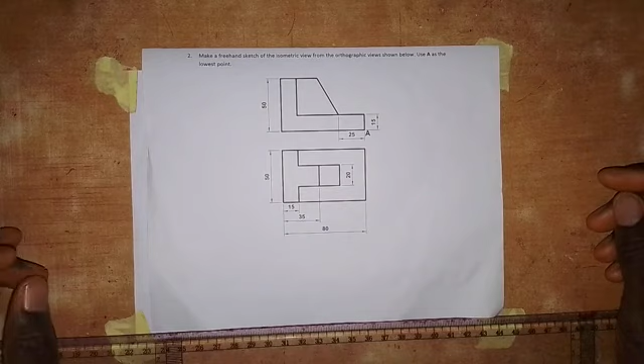Here we are going to be working on the making of the isometric view of this orthographic block views. So as we have here, we have these views drawn in first angle projection, as this is the front elevation and this is the plan.

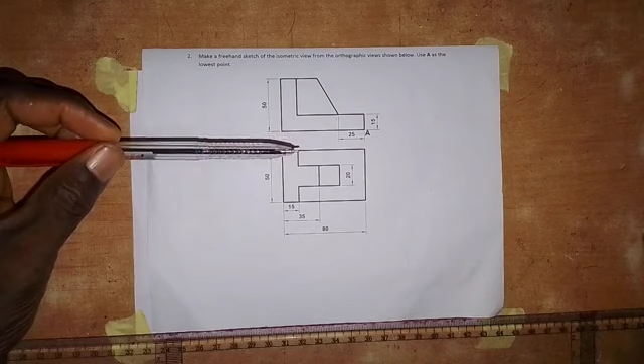Even if the front elevation and the plan is not indicated, as a technical drawing student, you should be able to know how the front elevation will look and how the plan will look. Okay, so very important. That's why paying attention in the class when you have been taught any topic in technical drawing is very important. Okay, so let's leave that.

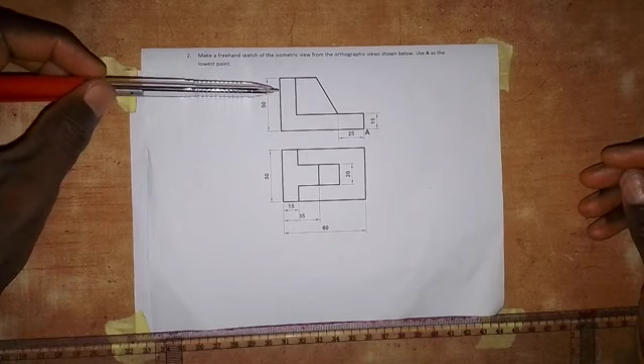Okay, now this is the front elevation, this is the plan. So let's look at the dimensions on the front elevation. We have the height from here to here to be 50 millimeters, and the distance of this point from this end is 25. The thickness is 15 millimeters, and then we have the lowest point here as point A.

Then coming down to the plan, total length from here to here is 80 millimeters, and for us to get this point here, which is this point in the front elevation, we are taking a measurement of 35 millimeters from this end to this end. The thickness of this is 15. That is, the thickness of this also is 15 in the front elevation. Then from here to here is 50 millimeters. Thickness of this is 20 millimeters.

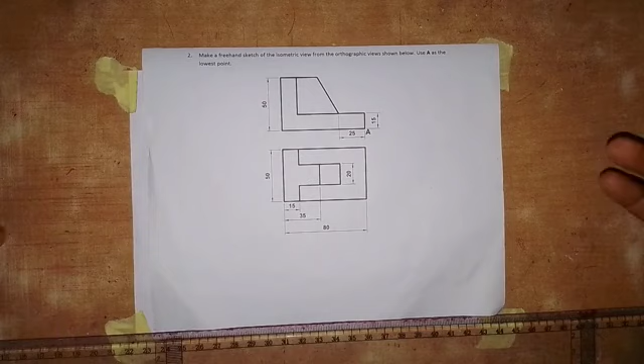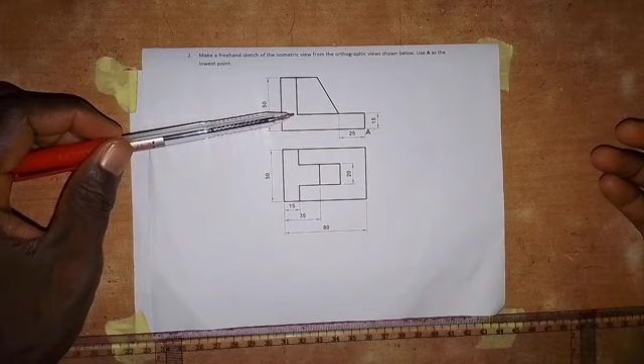Okay, so we put these parts together to obtain the isometric view of this object. But the first thing that we are going to do, as I've been saying, you need to be able to identify the main part that will give you the solid when you change it. This L shape is the main part. So first of all, produce this L shape in isometric, then we transform it into a solid object. So let's start and see how this can be done.

So the first thing that we are going to do here is to draw a short horizontal line. Just make it like this, and then on this horizontal line, mark the lowest point. Always indicate the lowest point A. So this is the lowest point, A.

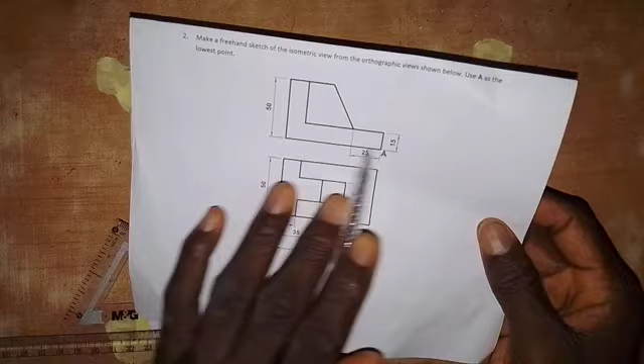Then with the 30 degrees set square being set at this point A here, the L shape should be made in this form. In this form, you cannot change it. That means it should be in isometric, but it should be on this side here. So this point should be here. Okay, this is what I'm saying.

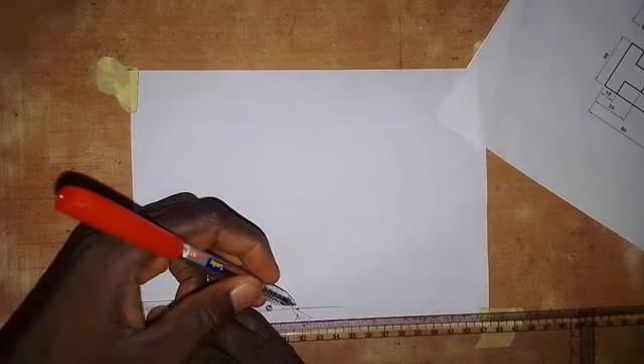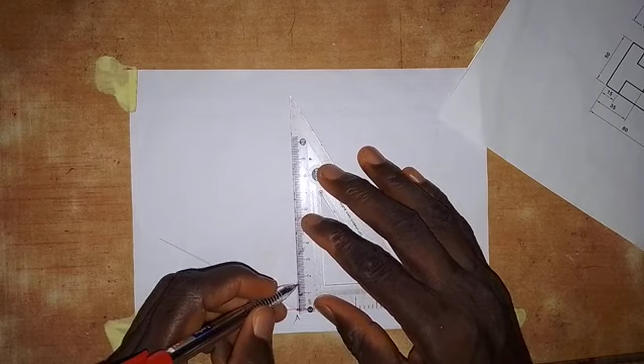So from this point A, draw a line in this direction, and then at this point, draw a short vertical line. So we are going to take measurement here. From this point A, take 15 millimeters up. And then you come to this point A, and take a measurement of 80 millimeters to this end. So this is 80 millimeters.

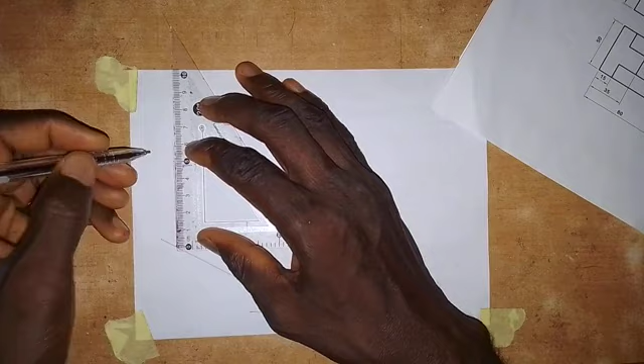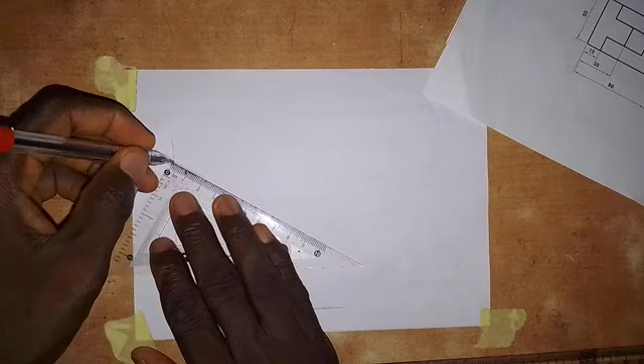At this point, we are going to draw a vertical line like this. Then take a measurement of 50 millimeters from this point. This is 50 millimeters, and then draw a line inward from this point here like this, and then take a measurement of 15 from this point on the vertical line. Take 15 millimeters inward and draw a vertical line down.

So draw a vertical line. Set the set square like this and draw a vertical line. Then this 15 that we have here, transfer it to touch this line that we just drew. Just like this. Okay, so we have produced the L shape as we see it here.

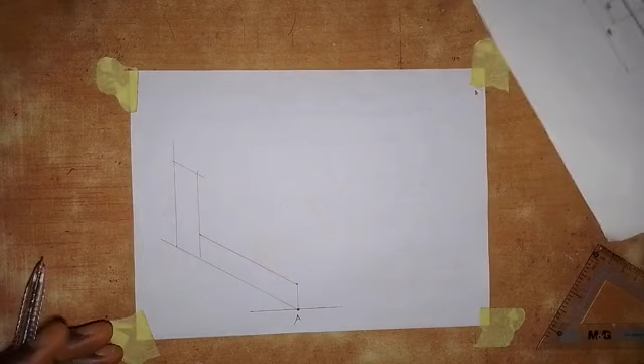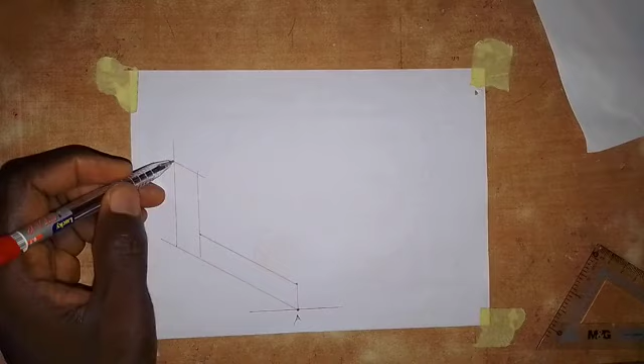Okay, the next thing that we are going to do is to transform it into a solid object, and to do that, from this point with 30 degrees set square, draw a line in this direction, and at this point also do the same. Here and here do the same. So this is what I'm saying. Take the 30 degrees set square, bring it to this point here.

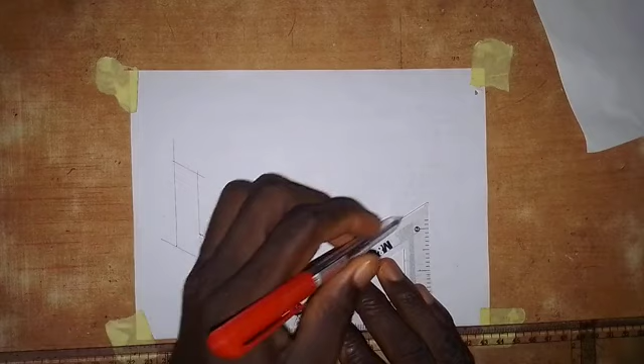So starting from this point A here, draw a line in this direction, and come to this point, you draw a line in this direction. Then coming to this point, draw a line in this direction. And then we come to this point, so we draw a line here in this direction. Then at this point, we do the same thing here.

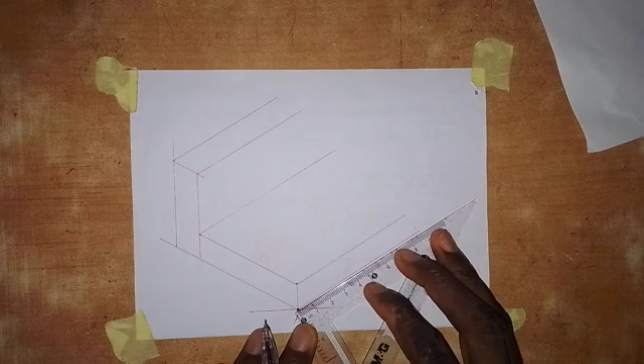Alright, so having done this, the next thing we are going to do is to take the width of the whole solid, which is 50 millimeters. So we come to this point and we take a measurement of 50 millimeters, this is 50. So at this point here, you have to draw a vertical line. So here we draw a vertical line.

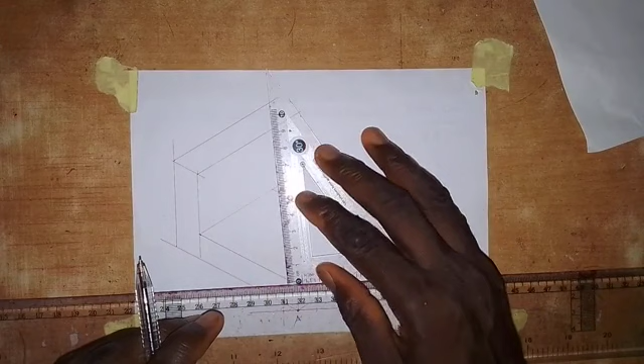Okay, then we turn the set square like this. Okay, so we draw a line in this direction. Then turn it vertical like this. Draw a vertical line to touch this line, and then we turn it from here. So draw a line to touch this line. So we have it to be a solid block like this.

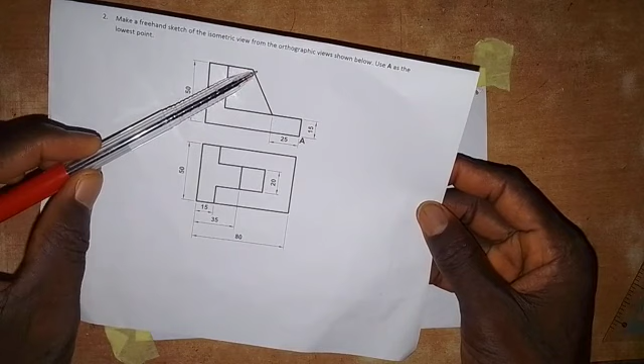Now, the next thing that we have here is to produce this shape as we have here. All right. So this point that we have here, we need to locate it, and this point from this end, this point here. This is the line that we have at this point in the plan. Then for us to get this line, we have to take a measurement of 35 millimeters. Okay, but this thing is drawn in the middle of the whole object.

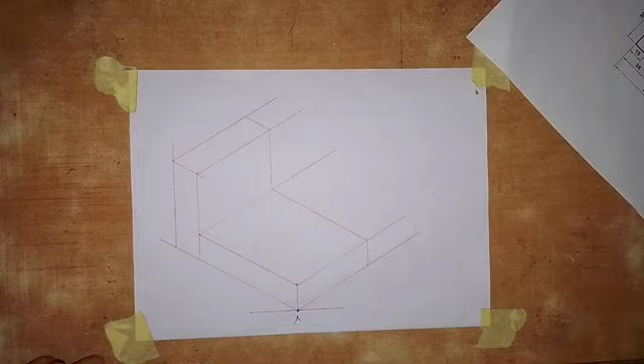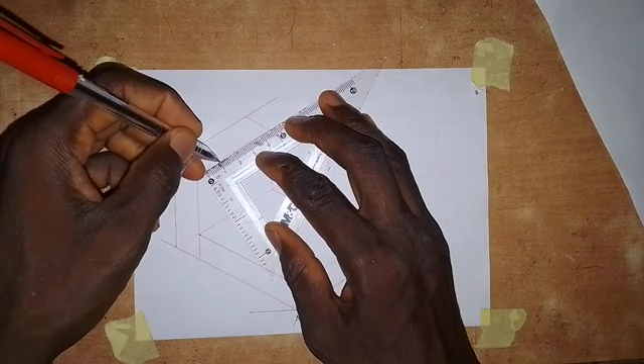Then before we can do that, there's something that we need to do. So first of all, break this 50 millimeters into two. That is 25 millimeters. Okay, then the thickness of this is 20 millimeters. So come to this point here. Take 10 millimeters down here and take 10 millimeters up here.

Okay, so making 20. Then from this point with your 30-degree set square, come to this point with the 30-degree set square, draw the line in this direction. Okay, and then you come to this point here. So to this point, draw a line in this direction.

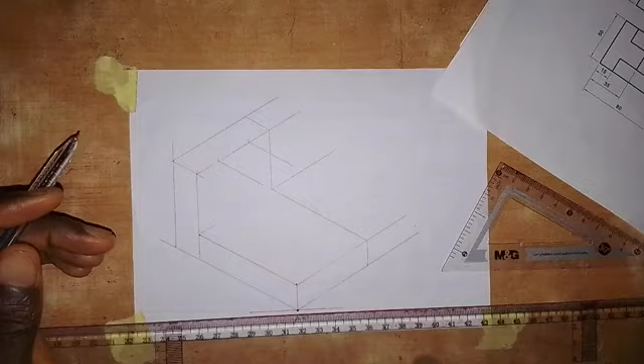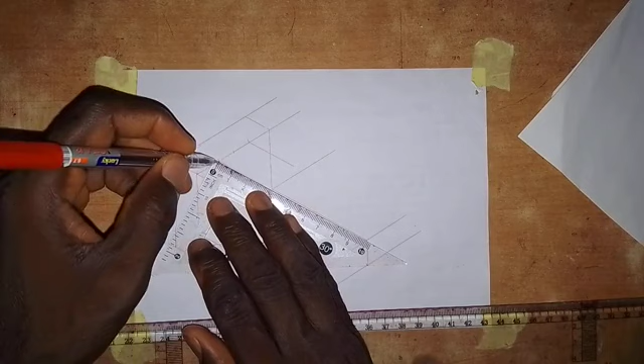Okay, so we need to locate this line now. To locate this line, if the distance from here to here is 15 and the whole from here to here is 35, then that means the distance from here to here is what? Is 20. So from this line that we have here, you take 20 millimeters forward from this point. So we have that line. So what we have to do now is to draw this line from here and join it with this one like this.

All right, so having done that, the next thing that we are going to do, we still come down here also. Or let's do it this way. For us to get this point, that is for us to draw this line, we will take a measurement of 25 from this end here. So let's take that 25 from this point here. So this is 25 millimeters.

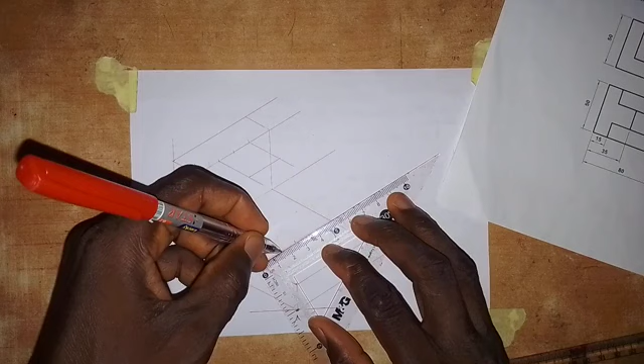Then transfer this point to this side, and then break this 50 millimeters into two. This is 25 in the middle. Then from this point, take 10 down and take 10 up like this. Okay, so now what we have to do is join these 2 points together. So this is also a non-isometric line. So these 2 points also, join them together like this.

Okay, now the next thing that we are going to do is to draw a vertical line. Just come to this point. Draw a vertical line from here down to touch this line. Then join these 2 points together with a straight line, like this. So we have completed the block as you can see it here.

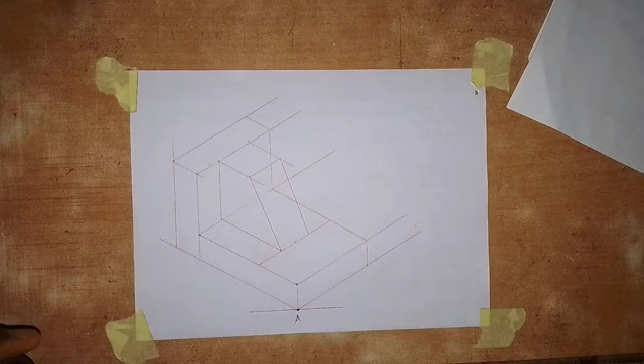So now we need to bring out the visible outlines and visible edges. I will pause the video, do that, and when I'm done, you will see how the object really looks. Alright, this is the isometric view of the object. This is how it will look. As simple as I've done it here. All you have to do is to practice.